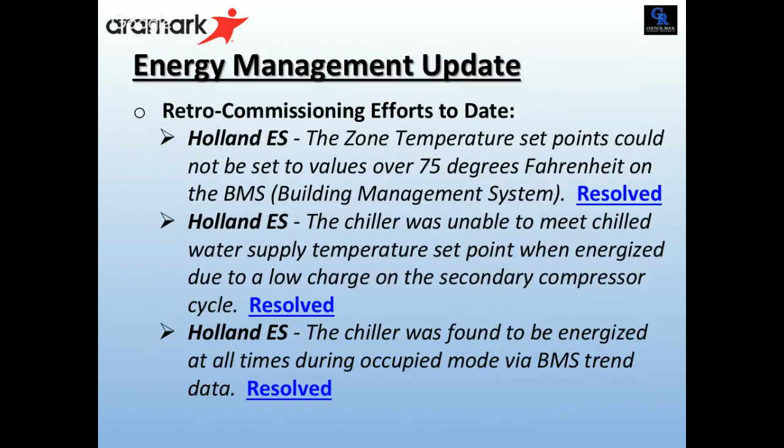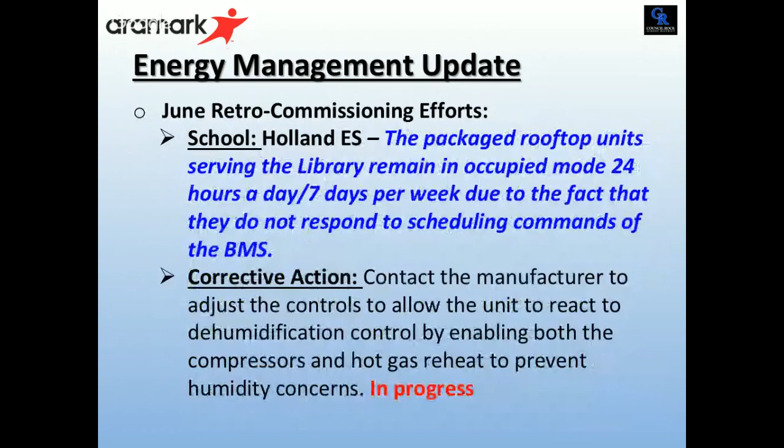A lot of the items we talked about in the past have been resolved. I have a running list here. Rolling Hills, we went over last meeting—we're still investigating the issues there. The corrective measures for Holland ES are in progress. Same with this slide, some are resolved, nothing new here to go over. Next meeting I'll have more on that—I'll bring you a good news report.

Facilities improvements project update: the new Newtown Middle School project. From an approval standpoint, we're in good shape. The land development agreement is off to the township—they have it, and the pledge agreement is with them. At this point we're waiting for the formal building permit and associated cost. When we get it, we'll take care of it.

The new Newtown Middle School schedule is going well. We are, I dare say, ahead of schedule on that project, even though it's a 2-year project—we're in very good shape, with a lot of things finished ahead of where it was originally scheduled. I won't go through all these items other than to say that if anything ever becomes concerning to me or looks like it's going to slide, I'll certainly be in front of this group to make you aware of it before it becomes a problem down the road.

So I'll always be conservative with that. I won't come to you and say we have a big problem—I'll come and say I have some concerns and we'll talk about it. So I don't have that comment tonight for either project. From a site standpoint, we have a lot of the stormwater features in place, certainly enough to construct the building pad itself. So that's moving well.

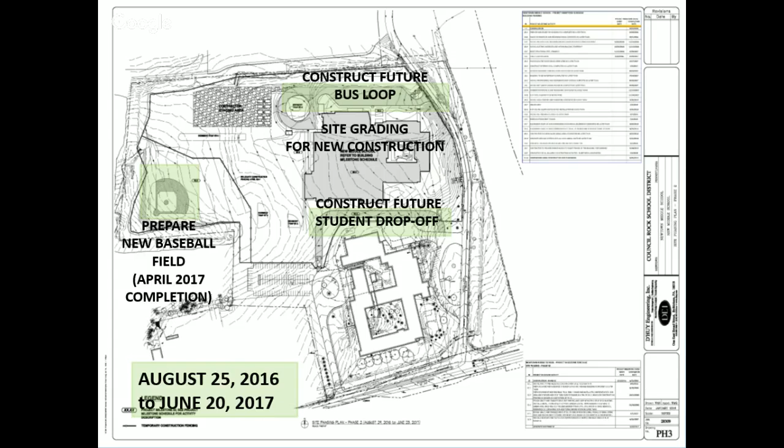Doug, why would you pave ahead of putting in your pad for the building? Is it just to help manage and keep the site stable and minimize the amount of dirt we take onto the street, since you're going to have heavy equipment coming across that? Yeah, that's fine actually, because if we encounter any issues with subsurface, I encourage that heavy traffic. Before we put wearing down, we proof roll to make sure there's no movement in the paving anyway, so we can take a loaded triaxle and have them run back and forth. I'm good for stabilizing as much as we can early, because the more we can pack early, the better for down the road.

Going back to this, so you're aware, the temporary parking lot is in place and striped. We've created some additional parking within the existing loop and across the back of the building, so we have ample parking between this and what we have over here, and out in front, to facilitate the school functions throughout the year.

From a photo standpoint, we took out what was the island here to create more space, so that's cleaned up. We connected the drive back around the building so we can maintain circulation around the building for buses and for emergency vehicles.

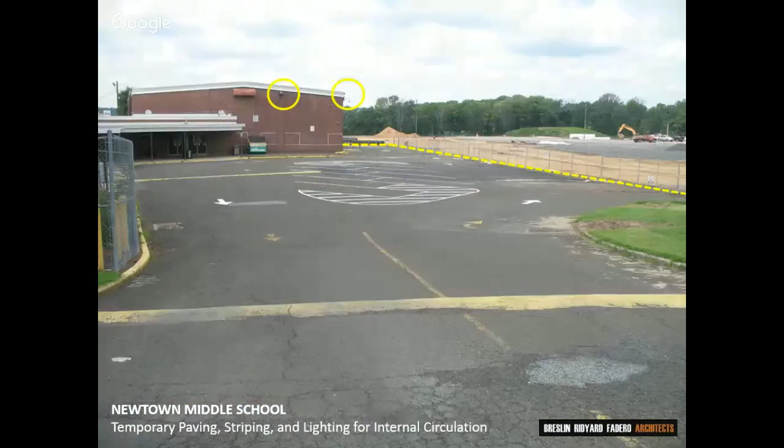Now you can see we actually created about 10 spaces in the middle. We still have a loop for parents to come around, and we still have circulation in the back. We've added a series of lights around the building, around the back side and far side, so we have well-lit spaces in the evening where we'll have vehicular traffic.

Also, you can see we've clearly separated the construction activities from the existing school, so we'll always have that barrier in place. We're also going to put some orange posts across here for the plow and for parents, so there's a bit more of a buffer between the paving and the fence as well.

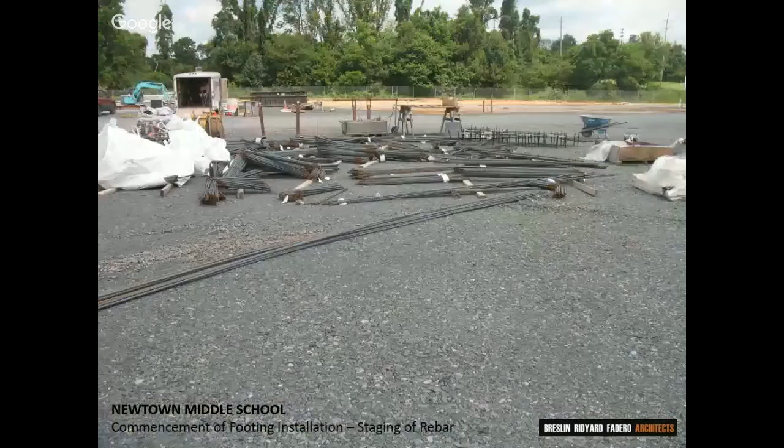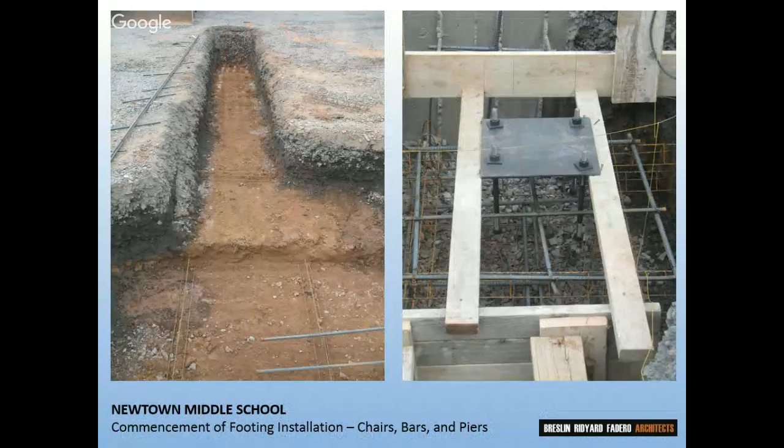The rebar was delivered for the first phase, and we're working on foundation systems for the building. Here you can see the construction of one of the piers for the columns, the base plate, and the trenching. You can see the rebar—they're putting chairs down so the bars aren't against the ground, getting the minimum dimension of concrete required around those.

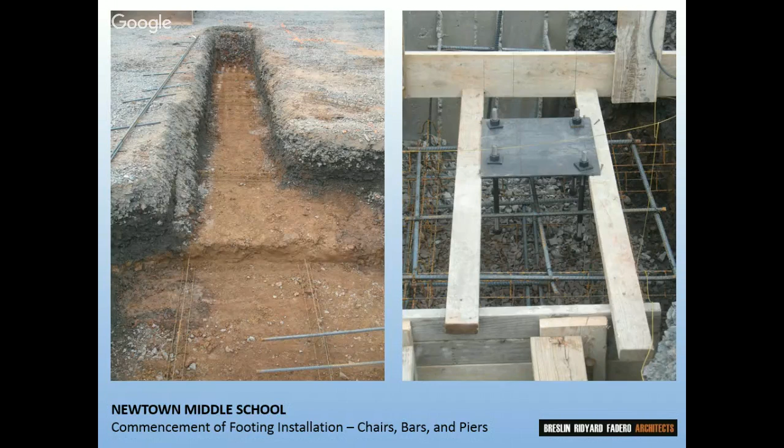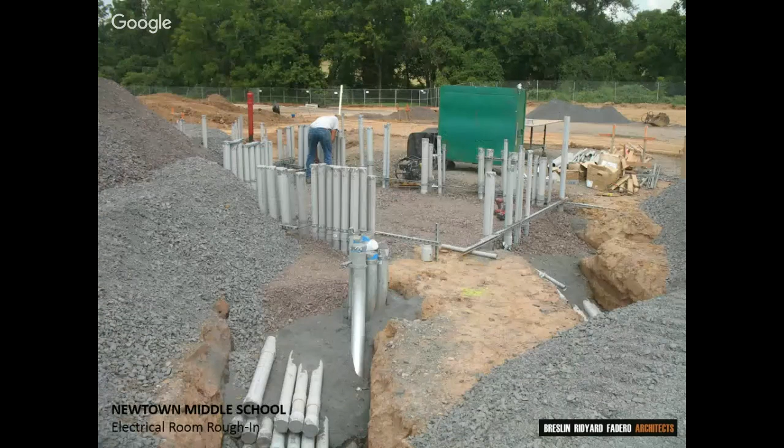This is the start of the electrical room. This is Tyler State Park in the back, the bus loop back in here. This is the beginning of what will be a very busy electrical room. The building energy will come in through this area—there's a duct bank across the back that feeds it. You can see the stubs that start to go into the building slab. Those are all conduits for when they start to pull all the wires.

Are we doing conduits to a data center room, or any networking room, or are we running that through the ceiling? Most of that's above ceiling, it'll be in IDF conduits as well. No, most of that is in a cable tray that runs above the ceiling.

It's plenum rated, and we have a cable tray because things change so often. Oftentimes they want to move things around, so you can easily go above the ceiling, pull it out of the rack, do what you want to do, and then go into the respective location. You made it easy, that was what I was getting at.

Back in the day, no architect wanted to see any exposed cable tray or wire molding across a wall. Now in every classroom, across the teaching wall and the back wall, we purposely put in raceways so you can open them up and make changes as technology changes. We're mindful of changing technologies.

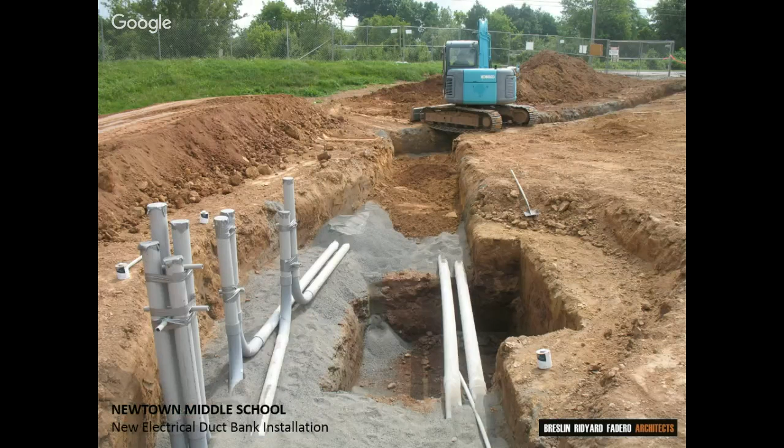This is Green Lane. This is the electrical service and the start of the duct bank from Green Lane to our site.

This is looking back, this is Tyler State Park again. The bus loop is over here. This is the baseball field construction. You can actually see the infield, the dirt, the grass area. This is scheduled to be completed within a year, so we can get an established lawn, a good growing season of a year or two before we start using it heavily.

We'll also create an area for PE classes initially, so we'll have a well-established area that keeps us off some of the other spaces.

The staging area, the trailers, this is probably one of the nicest areas I've seen as far as its surroundings, sitting back, tucked into Tyler State Park. We have power running to it, and come next job meeting we'll be out of the building and working out of the trailers with the contractors, since kids will be back, we'll be out of the school as well.

Building pad, again, just a lot of underslab roughing happening, and footings getting ready for the delivery of steel so we can start putting up some of the first phases of work, working from that boiler plant area out, so we can get the heart of the systems in and then start feeding the rest of the building.

So Holland Middle School, again, in very good shape. The biggest challenge is phase 1 through 1D. Phase 1 is the tech ed area we had to build in the front end of the building so we could remove the tech ed in the existing area and free it up for the first phase of classrooms. The contractors are there working hard, doing everything they can to get that space ready.

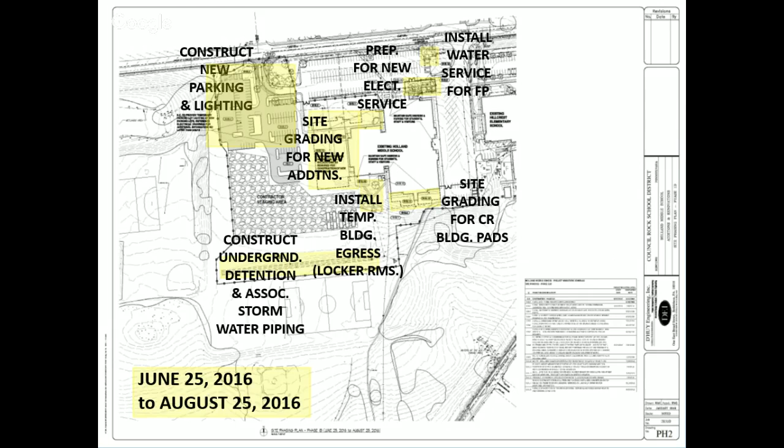From a building pad standpoint, we are working on the back side for the new auditorium. The new classroom construction is established here. You'll see some work happening in there, and work up here in the building services for chillers, for the electrical service. And where the existing locker room was up at the top, that's been demolished, and we're preparing for the new construction there as well. That went down in a hurry.

It did. Actually, too fast in some cases, but it's all okay.

We will maintain emergency egress to the fields that we still have in place. We always want to be sure that if there's school events, if we ever need to get an ambulance back to those areas, we can. So we are making it clear that they have to provide that emergency egress to those areas, stabilized stone to that point, or wherever it became the original grass area where they would have driven to, the same thing that was there.

The other thing I've added to this project now is all of the classroom renovation phasing. I'm not going to go over all these dates, but for all of phase 1, I have the scheduled dates on here. If you want to take a look after the presentation, these will all be in the PowerPoint to take a look at, but it talks about phase 1A.

These are actually keyed into the colors that are on the floor plans that the contractors have. Everything is looking real good through the dates that are projected for these respective phases. And as I said, it goes through phase 1D for phase 1. I'll go through those. Phase 2A through 5A, I'll give you more detail as we move to those come January of '17. There's really no sense in keeping all that on here now.

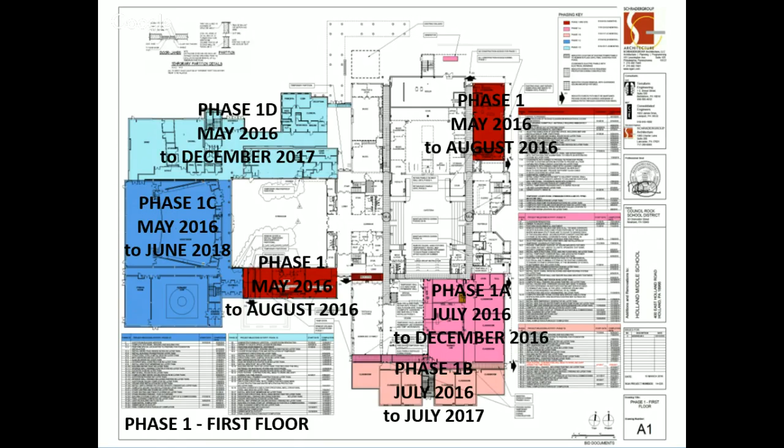Doug, I have to commend you on the number of windows. Managed to squeeze in everywhere you can. We wanted to get natural light in as many places as possible. I also think natural light is helpful for kids to find their way through buildings. You can get a sense of where you are by looking out windows as you go down hallways, and it gives you a sense of where you are.

So the way this is, phase 1A below and above, they're stacked. The HVAC that serve these spaces serve stacked spaces, so when we shut a unit off, we're not shutting it off to where kids are going to be occupying a space. They still have existing systems to serve their rooms.

So from a site standpoint, you've seen this picture before. This is where the tech ed work is happening. This was the shot of building the new wall at the tech ed.

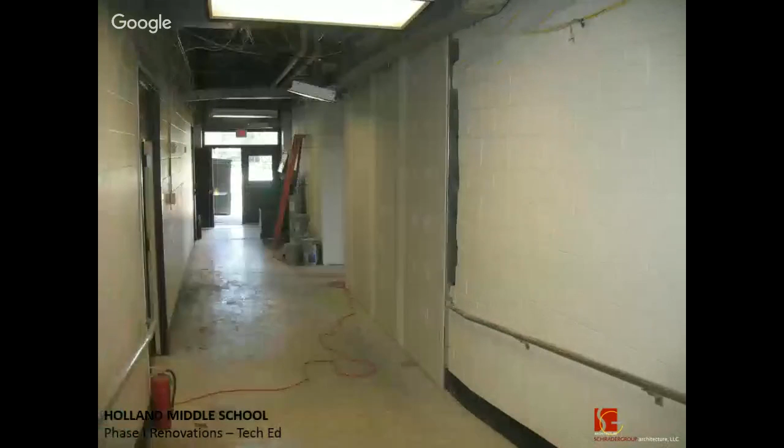Doug, you have one elevator in that building now. Yes. How does this work when students are in the building? Will that elevator always be available? That elevator will always be available until the new elevator is in, it's not phased. Either way, you'll have vertical circulation. You understand what I'm saying.

This is the new shot again of that space. Now, this is drywall, but when the building is finished, all of the corridor walls get a ceramic tile wainscot up to 6 feet. So they'll be protected and sustainable for 30 years. Exposed drywall is just never a great product in a hallway.

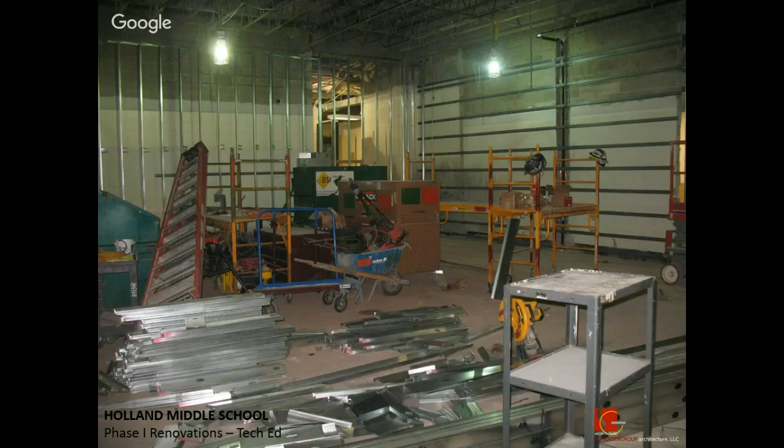This was the space, and now you can see the windows are actually now installed. This is the large shop area. You're standing in the classroom looking into the shop area. They were preparing the floor.

Originally, this floor was scheduled for just a sealer over the existing concrete, but as we looked at it, the floor has terrazzo that was ground into it, with patching around it. It had cuts all over it from filling in. So we talked about putting a thin-set epoxy system over the entire floor so it clearly covers all of those irregularities, feels like a new floor, and is durable for that kind of space.

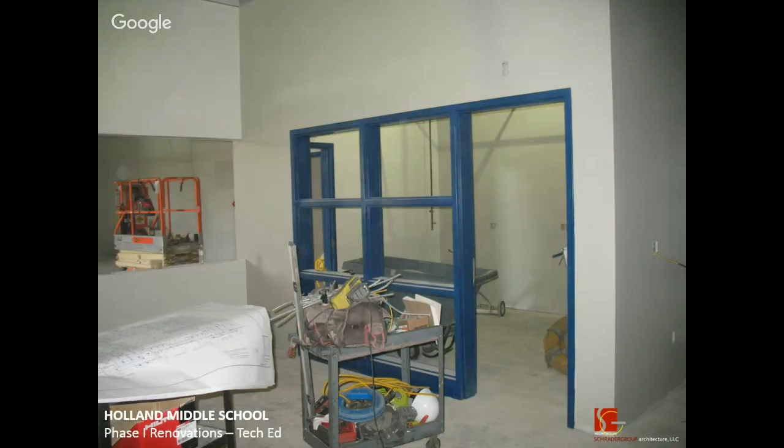We had that product elsewhere, so that contractor is going to put it in this space. It held us up about a week, but the finished product would have been real bad otherwise - you would have asked what we were thinking. It's self-leveling too, so you get a nice smooth finish. This is the office space, the classroom, the workspace beyond, and the office space in between.

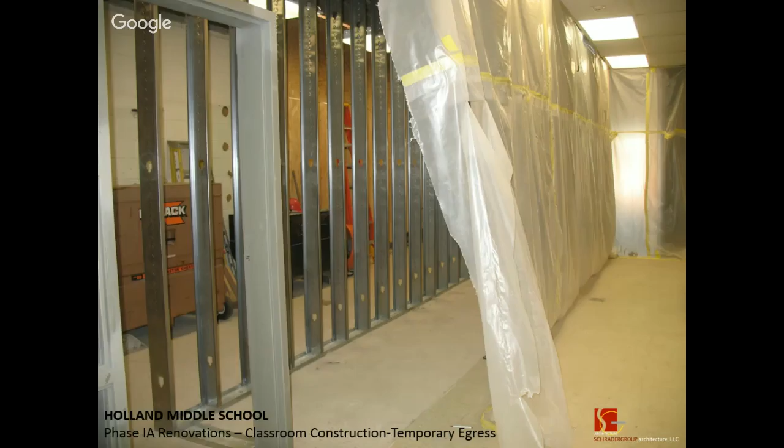This is the existing space downstairs on the ground level where Family Consumer Science is. We built a partition to separate existing from new.

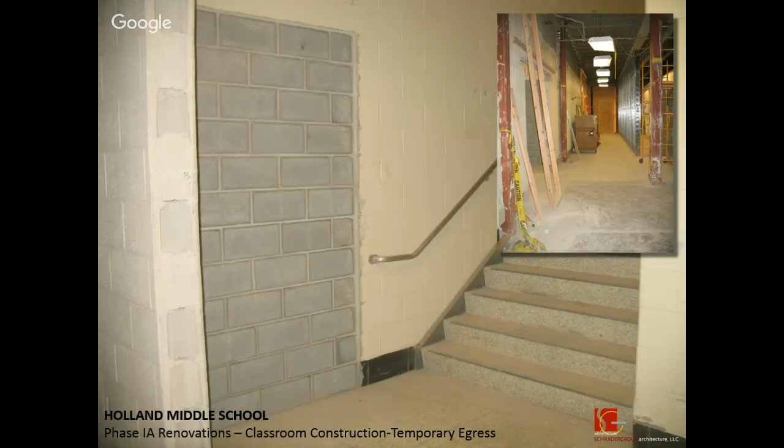More importantly, the stair tower that faces the fields, with classrooms on either side, terminates the egress from the upper level. To address that, as you come out of this stair tower, we created a fire-rated hallway with a door to the exterior. So we still have a safe means of egress from the upper level to the lower level and out to blue sky - new temporary fire hallways to do that. We've thought about how the egress works through all the phases.

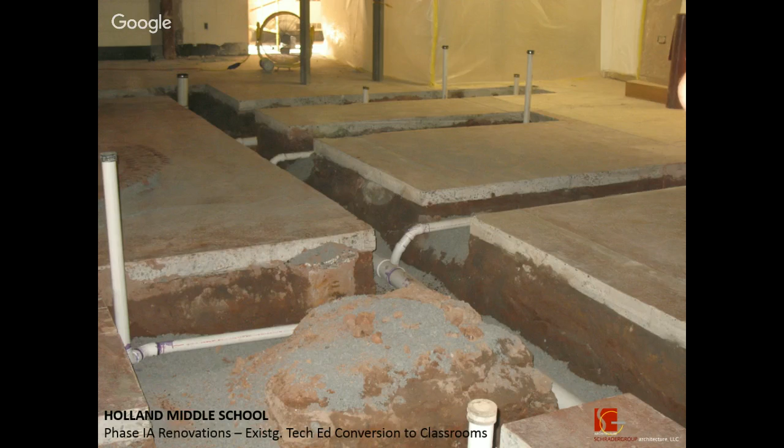This is the lower level. Again, this will be the science area in the existing building, but all of this underground piping had to go in to serve new sinks for the science rooms. The slab on grade work is always tough and most expensive in an existing building because of all the cutting and patching. On an elevated slab it's not so bad - you drill a hole in the floor and get the piping in from the ceiling.

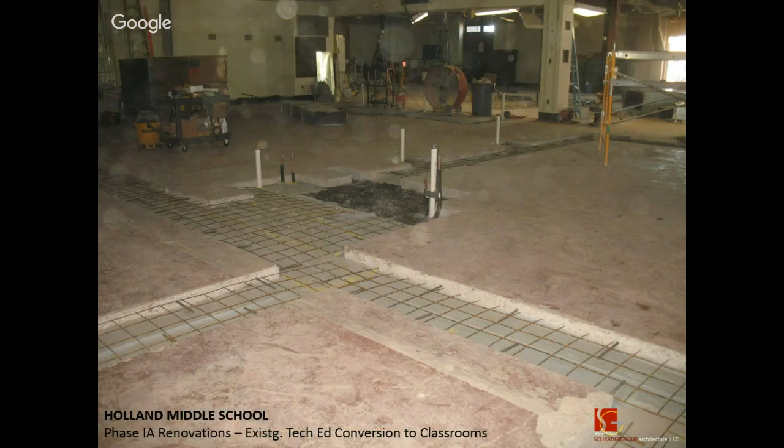A couple more shots of that lower level - you can see all the partitions have been removed, and we are now laying out for new construction. We're putting in vapor barrier, taking the joints, getting reinforcing in, actually putting dowels into the existing concrete, and then pouring new infill, so those pieces should not move at all once they're in place.

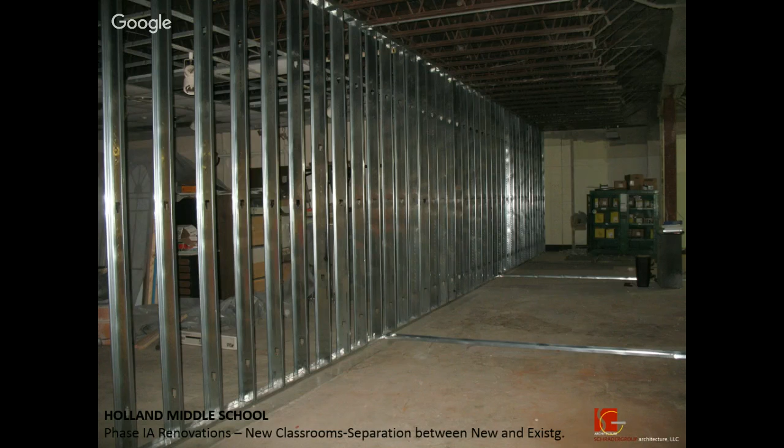Tough to see, but this is the area where we're going to be working. This is going to be occupied space. We'll have insulation here and board on both sides to separate the existing space from the construction area.

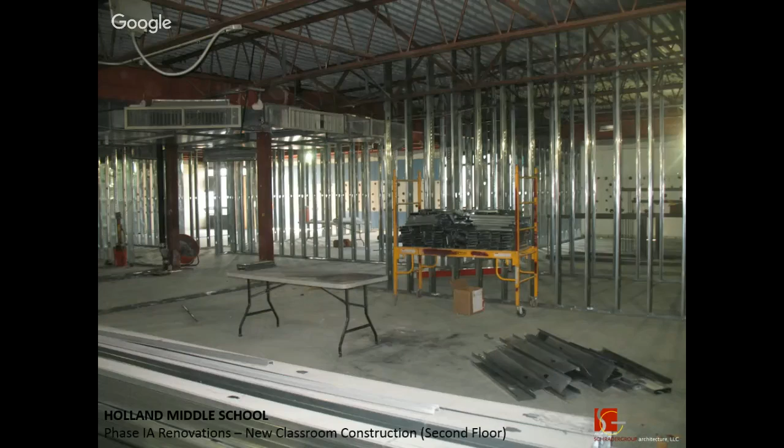You can start to see the framing classrooms taking shape with some corridors coming in line. This will be a classroom, and those are the windows you'll have in that classroom. So you can now, from a classroom, see some trees, see some blue sky, and probably feel a bit better in those spaces than the dark space.

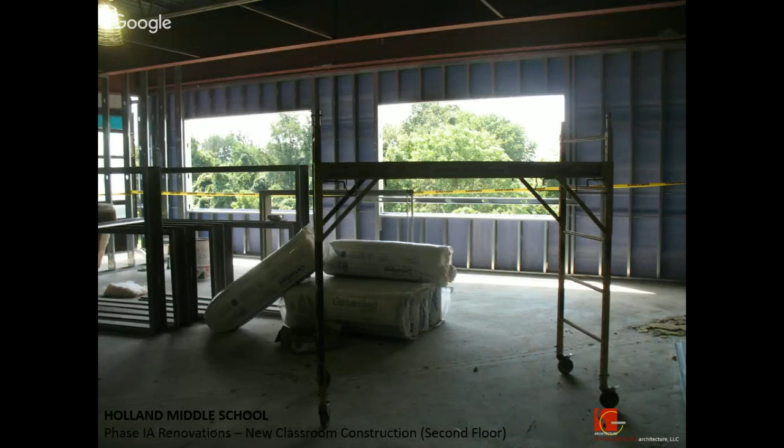That's science? That's a standard classroom on the upper floor, looking down towards Buff Road.

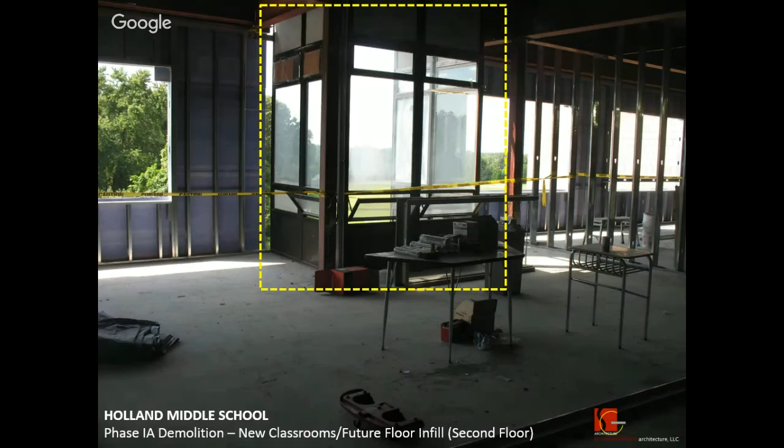Even when there were classrooms with windows, they didn't look like those windows. No, they were like little tiny ones, and not necessarily a logical place in the wall even. That's fantastic. So you can see there's a classroom with windows, with another classroom with windows.

This indentation here with the columns gets infilled, the roof gets infilled and goes straight across, so we don't have those bumps bumping into the rooms or columns in the middle of a room. All of that infill still has to happen.

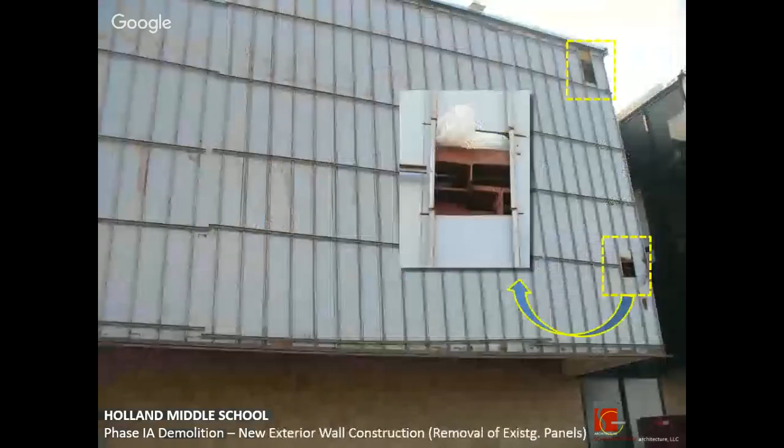Same in that corner? No, the one place we did not address it are the corners. We left it, these window systems will go and new walls will be installed, but those notches remain. Why the corners? From an architectural standpoint, it does not function poorly for the classroom and the orientation of the students and columns, and it worked okay. The others were definitely impeding.

What was the purpose of the others? It was an architectural element when they created it, to create those little niches, so they didn't have a running wall all the way down. And especially with the little windows they had, it would look pretty bad, I think. So I guess 1970s design was a lot different than today.

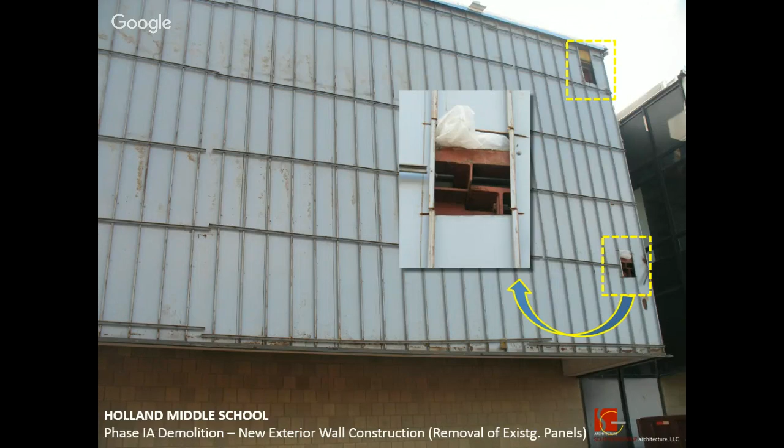So we took the panels off the building. Those brown panels you see outside are basically double-sided. There's an outside panel, which is that big panel, some insulation in the middle, and the back side of that metal panel is painted, and that's the interior wall you see in that building today. That's all it was, just a little sandwich panel.

We did investigations early. We took some pieces off to see where the steel is, where the edge of slab is, where all the existing floor framing is, to be sure that when we come back later and put a steel angle across here to tie into the existing structure to support our brick veneer, that all of that works in accordance with the drawing. So we had them go in early and do some investigation, showing the due diligence the contractors are taking as they move through this.

That's one of those little notches that gets filled in.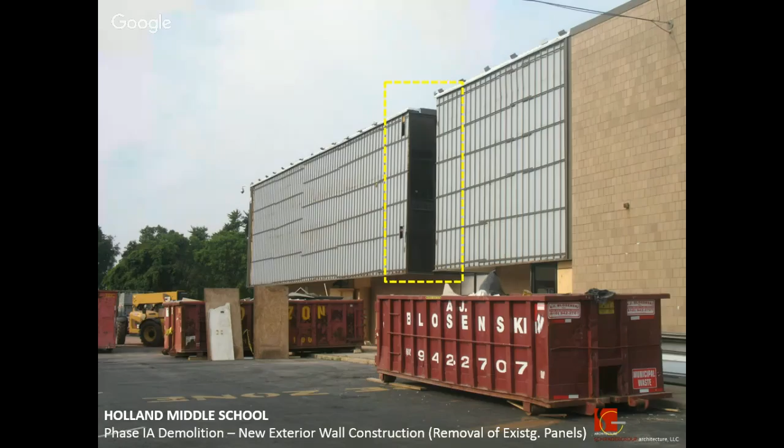Again, same thing, you can see our recycling: all of the concrete material goes in a dumpster, wood in another, metal, we separate all that as part of our LEED process.

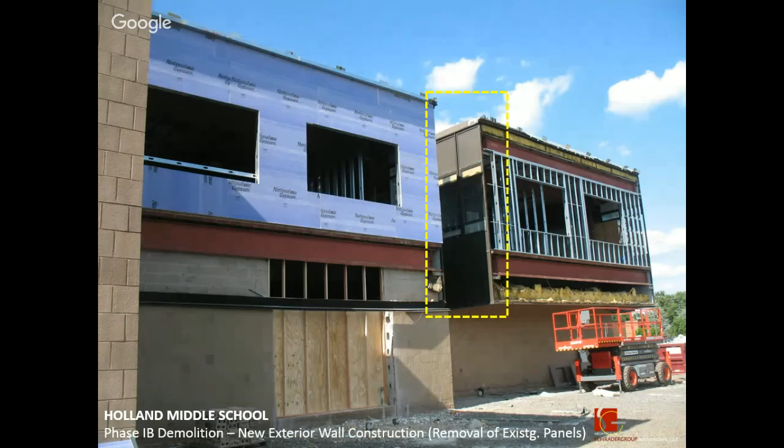Here you can see the classrooms as we start to move through, new classrooms taking shape. This is where the new classrooms will go. It's important that we get this upper level finished, so then we start building the lower level from a staging standpoint, we're not working over top of a new building to put in construction above it.

Here you can see the stone pad that's in place. What's interesting on this project is because we were working up against an existing building, the footings for this building, if they were 3 feet down, we would have just trenched, poured our footing up against it, no big deal. But these footings are down a significant distance because of dimension and the soils conditions they had when they built the building, so to go down 10 feet or wherever they are would be very expensive.

So we're putting in micro piles, which are small columns, spaced at specific dimensions. They then trench and pour a concrete footing on top of those, and they act like posts or columns you'd see at a beach house. It sits up out of the ground, so that footing will run across and build off the top of that existing footing. Before we could put all those micro piles in place, we had to perform a test pile.

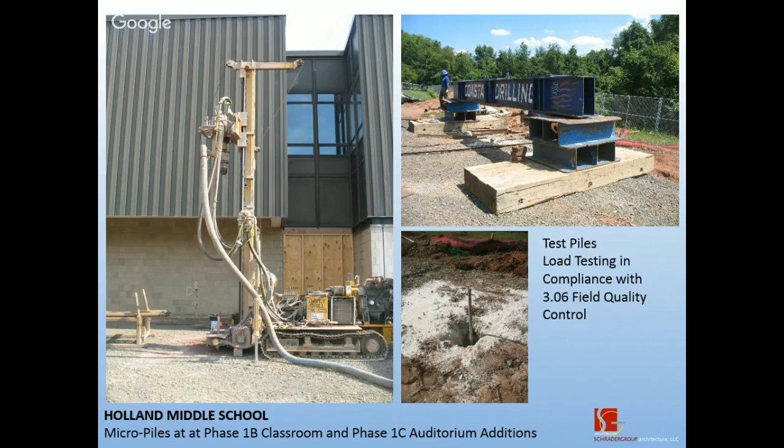So they put in three piers, down about 20 feet. They bring this rig in, connect it to the middle, and put a load on the middle—1.5 times the design load on the other piers. They pull on the outside to see if everything is in compliance with the designer's requirements. In this case, we had not a single issue.

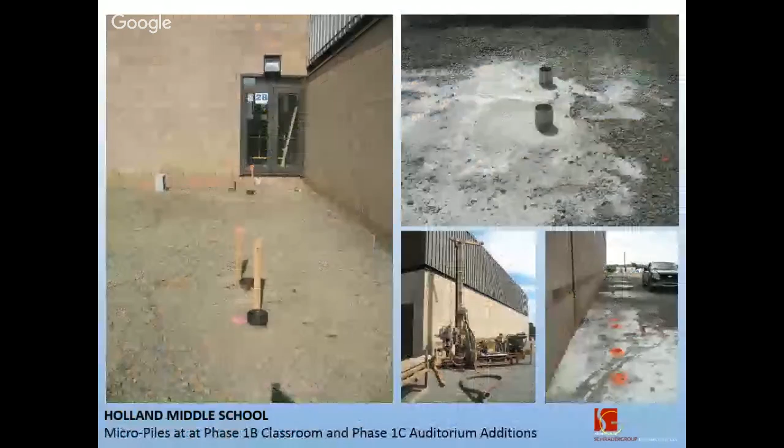Everything went well, and they proceeded. So then they drill these micropiles with this machine, drilling down till they hit refusal. They pour the core with concrete, and then a concrete footing will span over top of these to support the structure above. Here at the auditorium addition you can see a line of the micropiles as well. Doug, are they reinforced—steel reinforced—or just concrete pillars? There's a steel pier casing around those as well.

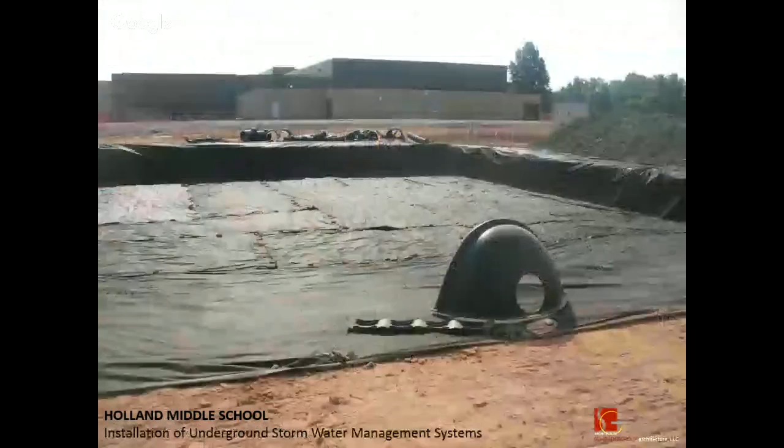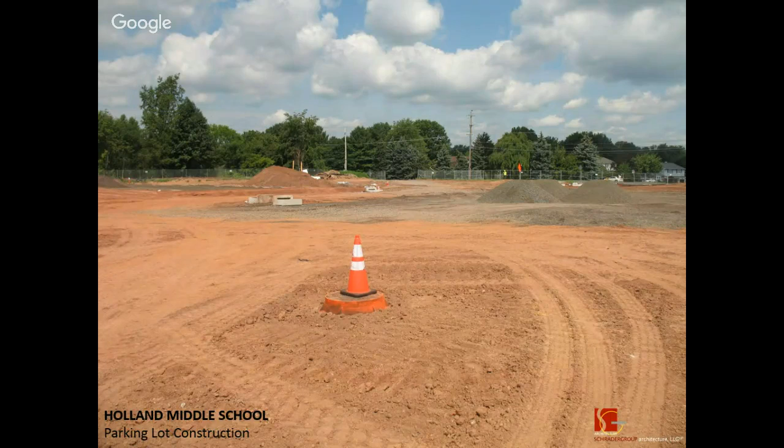All of the storm structures were delivered, and they started to build. The base is similar to what you saw at Newtown. The underground stormwater management, all of our channels went in. You can see the stone went in, and when it's done it feels like a site. We're able to take advantage of that instead of a big basin that you'd lose to mowing and that would hold water and discharge over time. We're actually able to build a parking lot over top of it and maximize our building area, so it's beneficial in that regard. This is the parking lot area that will be completed in two weeks.

These are the storm structures ready to go. Curbs will match up to these heading out towards East Holland Road.

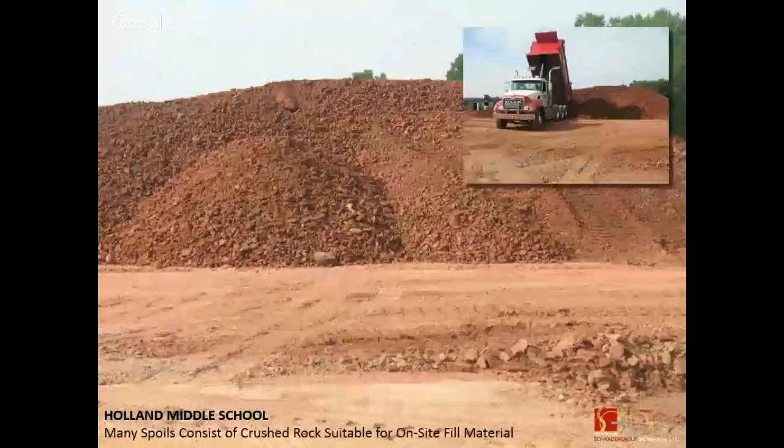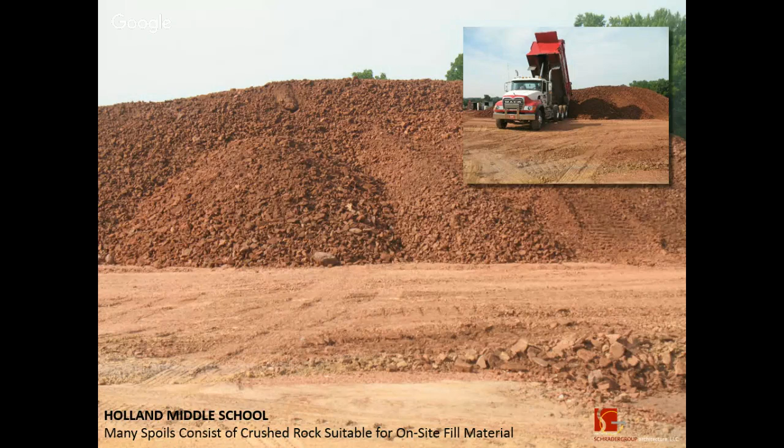The excavations are very interesting. We're digging up what looks like stone fill from the past, but it isn't—the site is just made up of this stone-like product. It's really great stuff because we're able to use it for fill elsewhere on the site. It's nice to not have to export material and instead take advantage of materials we're digging up to recycle on our site.

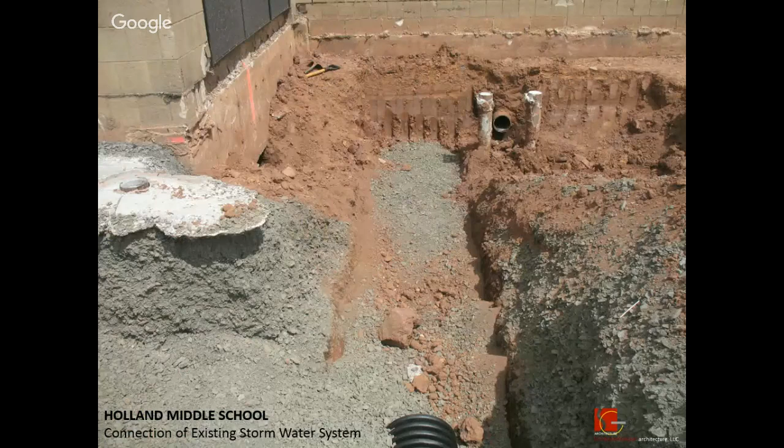We're now tying into existing stormwater, so this is new. We're going to connect to it and get that to new storm. Here's one of our micropiles off to the side. This is that locker area—it's all cleaned up at this point. They'll begin getting ready for footings here soon. Here's another storm drain; we're going to connect to this and get it out to storm as well. So we're picking up the existing storm drainage.

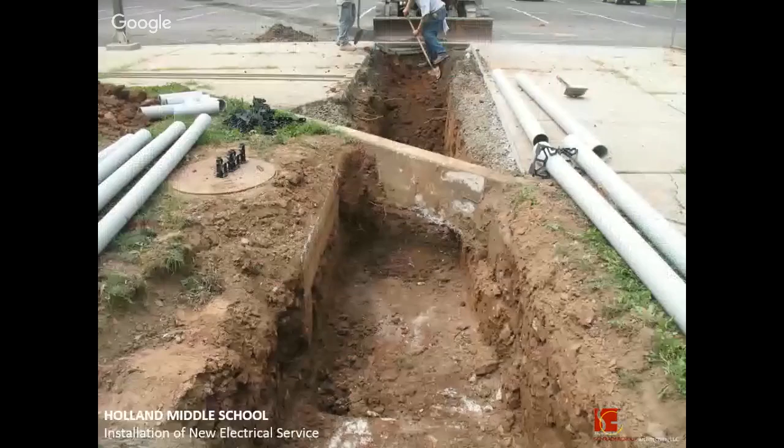Bringing in electric to the site from East Holland. And that's an update on those two projects—it's very exciting to me.

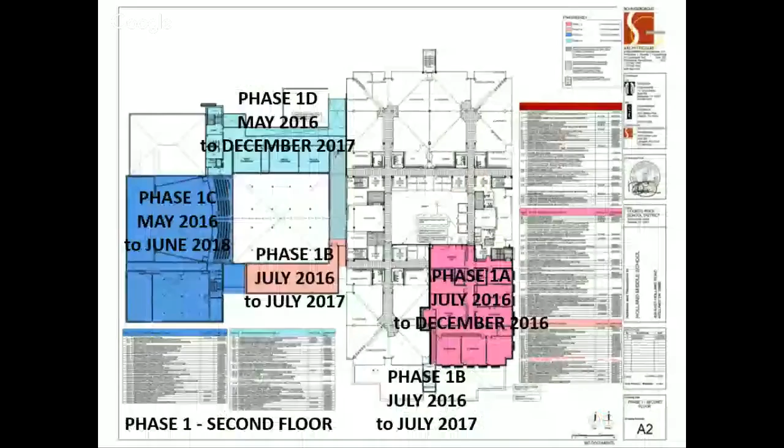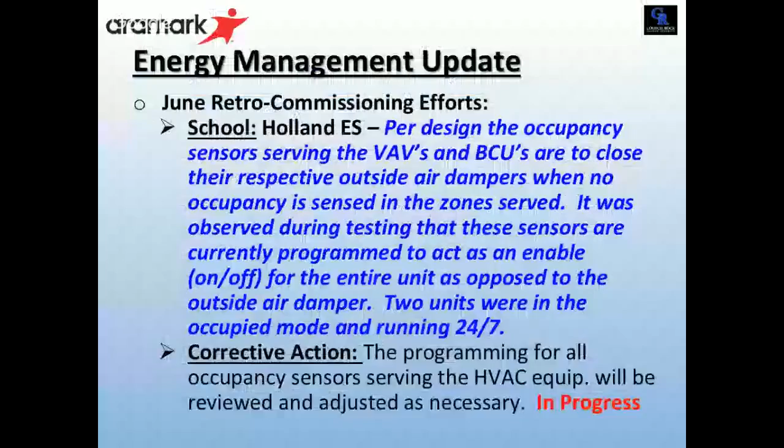We're going to move to the item for board approval, which came up as a result of some damage at one of the elementary schools. It is subject to an insurance claim. Kapua, if you want to take roll of board members. Mr. Violet—here. Mrs. Brooks—here. Mr. Brock—present. Mrs. McKessie—here. Mrs. Thomas—here. Dr. Thorwald—here. The others not present are Mr. Block, Dr. Foster, and Mr. T—all three have registered that they're either traveling for business or otherwise engaged this evening.

We can take a motion if someone wants—there's a motion printed here. I'll read it: I move to award bid number 16-47, Richboro Elementary School ceiling tile replacement, to TE Construction Services LLC at a cost not to exceed $54,750, subject to audit. Thank you, Mr. Thorwald. Second—Mr. Violet seconds.

Mr. Taylor, you want to walk through the presentation, please? Yeah, just a couple slides on this. On Monday, the 27th of June, we came in and encountered extensive water on the floor of two of the main corridors and two intersecting corridors on the backside of the building.

We found, after following the trail of water in one of the classrooms beneath the sink, that one of the braided hoses connecting to the hot water line had failed. We're not sure if it happened late Sunday or early Monday. At any rate, we had a lot of water on the tile floors, and in that classroom itself some of it migrated into other classrooms down the hallway, but minimally.

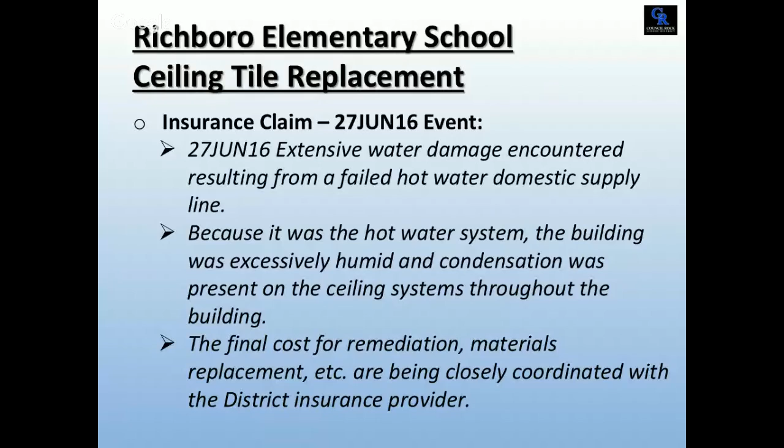So all of the ceiling tile came out. We cleaned everything up and dried it out, then went out to bid on August 5th. We got 7 bidders. The bids ranged from the low bid that you just made a motion for, all the way up to $198,000. It's always a big range.

I can't explain it other than, I'm not sure - they were just throwing darts perhaps. The low bidder is actually working for us right now on modular removal projects. So the good news is, even though we'll collect the information again, we have their bonds, we have their insurance company - we're very comfortable with this contractor. They actually did the Welsh Elementary School cast stone replacement for us, and the floors at Richboro Middle School. They've done a lot of work for us throughout the district, and everything has always been very good.

Window replacement at Welsh - very pleased that they got the job, and they're ready to go.

They're looking for - just curious, was that who you were going to use before we had to go to RFP? It's funny you say that. We were just wondering if the process hinders us with a lot of extra work or helps us. There are times it definitely helps.

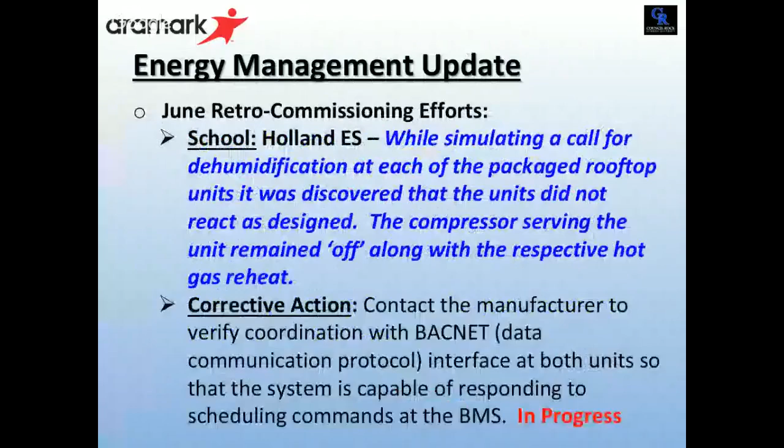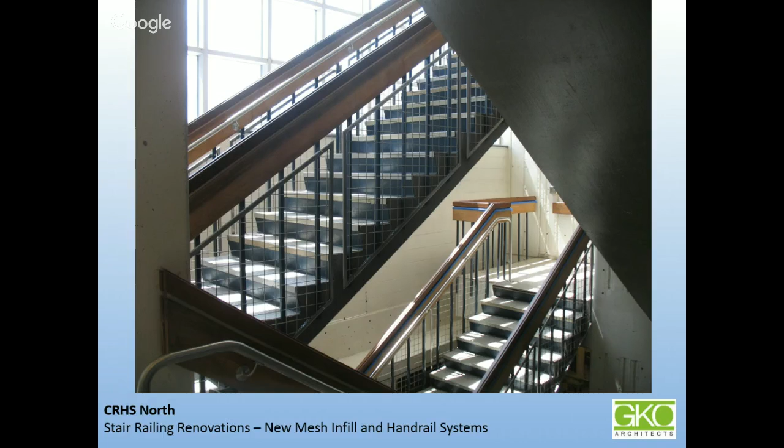So you can see that we're in better shape than we were. The auditorium also had very large openings at the ends. The architect went with wood to match the existing wood in that area to protect the ends of what I call the balcony seating, the seating in the back.

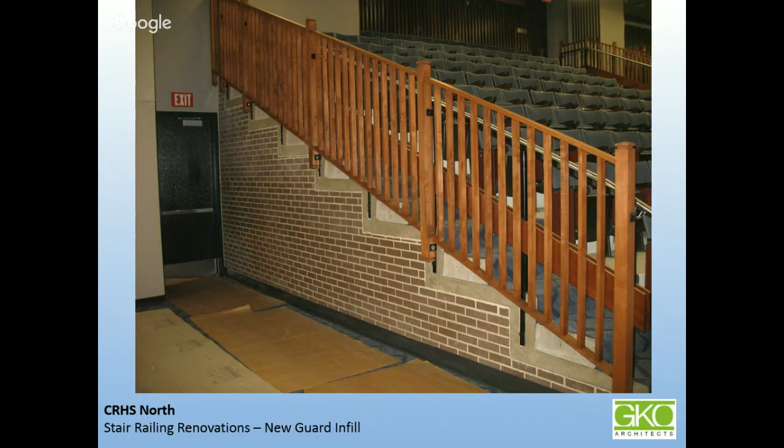So Jerry, in the auxiliary gym, everywhere there's a column, it was so bad here they had plywood up because pieces of the block were falling. A lot of these things I'll look past and keep on the list, they won't be high priority, but when block starts falling on kids' heads, I move it to high priority. No kids were hurt in the making of these pictures.

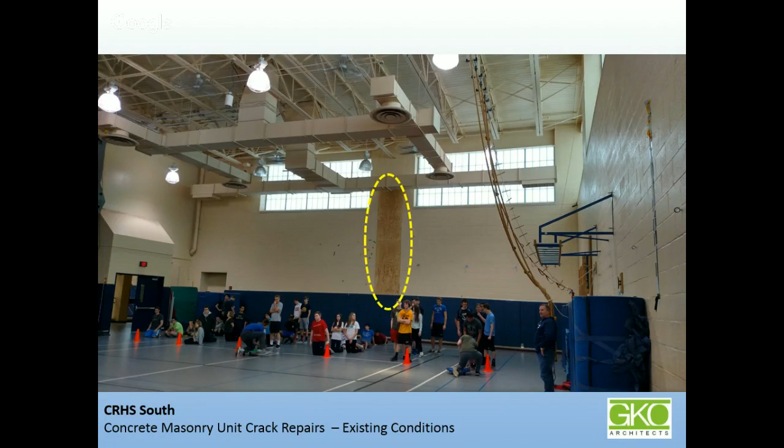There was a whole discussion when we first opened this building about a climbing wall, where it should be. That's over here where the infill wall is, that's good news, the infill wall.

And actually it's not a major structural issue. It's that wherever there's a column and you had block running in front of it - this might be an 8-inch block, about a 1.5 inch wall when it runs past it. All of these, we saw-cut each side. We put a solid soap block, like a 1 5/8 block, in front of it, stack bonded it, and there's masonry reinforcing every 16 inches back to the column. There's a soft joint on each side, so it ties into the block on each side to the column behind it with soft joints. So now if there's any movement, those soft joints should take that movement versus the block itself.

These will all be painted by the end of the week and that space is good to go.

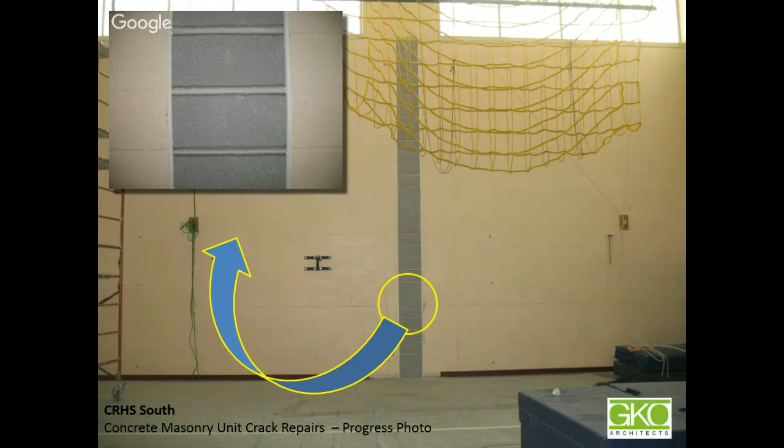This is an architect who designed that, not involved with the two buildings we're doing now. The architect who designed this is not the architect involved in any of the two buildings we're doing now. That's correct.

Yeah, these are the soft joints, that's the horizontal joint, all tied together, good to go.

Miscellaneous update.

A couple other contracts, thank you very much, thank you.

A couple other contracts that I'll be getting out in front of you in the near future: snow removal service, which really excites me at 105 degrees, salt and de-icing materials - I love talking about it when it's hot out - and emergency generators. I came to you with a series of service contracts not long ago, one that wasn't in there that we realized should have been was emergency generators. We've had them serviced just now, so we're good for the next 3 or 4 months, so it's not an emergency to get to the emergency generators.

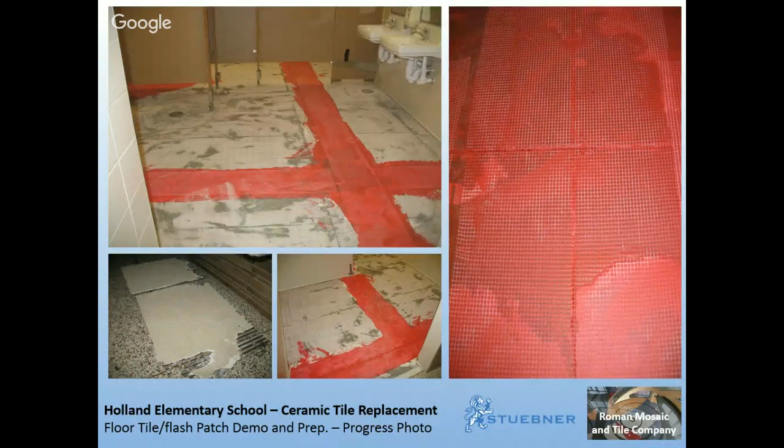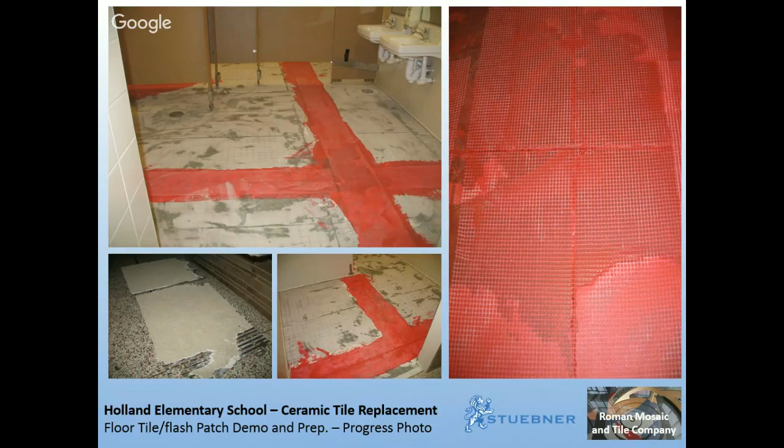This is what I call an Epiflex material. It's like a fiberglass material with a binder that allows for some movement in the joint. They'll put a soft joint in the tile over these existing saw cuts in the slab, so that if there's movement in the slab, it doesn't telegraph through the tile. So there'll be like a caulk joint to match the grout, and everything else will be hard grouted.

What they're realizing, and this again is not an issue for us, it's an issue between Roman Mosaic and Stuebner, who's the general contractor. Between them, they're arguing that Roman came in and started working and said, hey, yeah, if it's ours, we'll do it. As they were taking tile out, that's tile underneath. This is the flash patch, the material between the concrete floor and the tile itself.

To level the floor, they'll come in with a self-leveling cementitious product, float it across the floor. Then the tile guy will come in and put tile on it. The flash patch is lifting off the concrete, so the tile guy is saying, well, what am I doing here? I'm fixing a product that bonded to the flash patch, this isn't my fault. So now there's a little bit of... How does that happen?

When they first did the work, they didn't prepare the concrete properly. So when they put the self-leveling down and it cured, and you were ready to put tile down, it was bonded. But over time, that self-leveling product started to lose its bond and failed.

Basically it's like glue - you can hear it when you tap it, it's hollow underneath. So for whatever reason, it didn't bond the way it needed to. They're taking care of the large rooms they promised us. There are other rooms with small areas that need to be addressed, and there's going to be some pushback on that, so I now have to follow through with the contractor and their subcontractor on how to address it. Stay tuned, I'm going to keep working on this to get them back, but right now we're getting the big areas done that were most problematic.

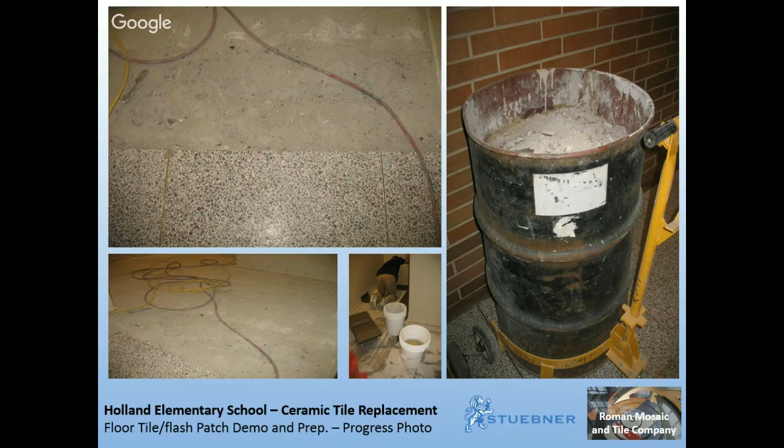It'll be ready for the 29th. Yes, absolutely - you can see barrels of old product being taken out. Roman Mosaic is very good, a very good terrazzo tile contractor, one of the best actually. So I'm confident in their work. It's just an issue between them and another contractor.